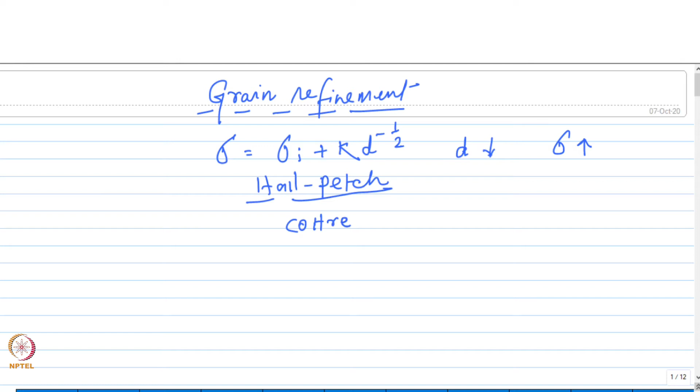This is due to the fact that as you decrease the grain size, you basically increase the grain boundary area per unit volume, and since the grain boundaries act as hindrance to dislocation motion, the strength will increase as the number of grain boundaries increases. Okay, and we have actually derived this Hall-Petch relationship based upon a theory which was proposed by Cottrell and then later extended by Eshelby, Frank and Nabarro.

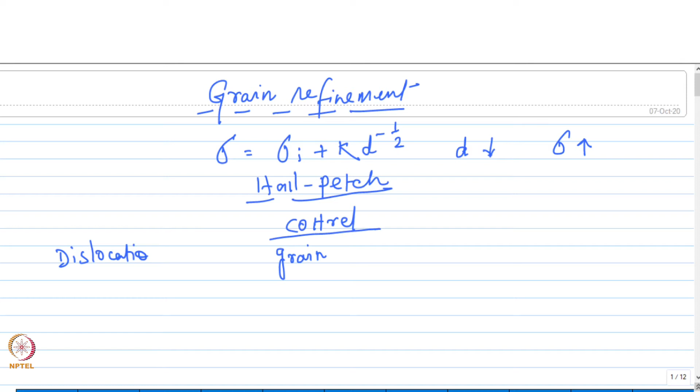So this theory is based upon the piling up of dislocations at grain boundaries. So if you consider any pile-up of a given length inside a grain like this, where the grain boundaries stop the dislocations as they encounter the boundary.

From this, you can actually derive this Hall-Petch relationship based upon the stress which is developed at the tip of the pile-up. Okay, so that's what we did in the previous class based upon that stress tau s and a critical stress which is needed for the dislocations to move over to the next grain, tau c. We actually derived this Hall-Petch relationship.

Okay, but there are certain limitations of this pile-up theory, because as we have seen, this is based upon the stress which is developed by the dislocation pile-up. So you need a large enough pile-up for that to occur. But if the grain size is very small, then the pile-up will also be small, and therefore you cannot really consider the approach that we had taken to arrive at the Hall-Petch equation. In that case you need to consider other equations also when the grain size becomes very small, because for a small grain size the pile-up will also be smaller.

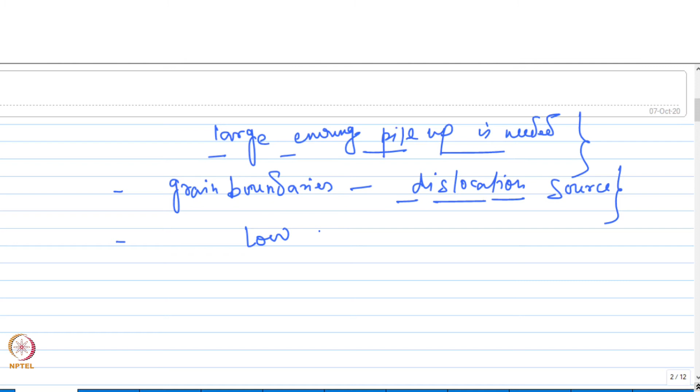And the other issue with this model or this theory is the fact that for the pile-up to occur, the dislocation movement also has to be limited or restricted. And we have seen that the stacking fault energy will play a role in that. If the stacking fault energy is low, then you can expect the dislocation movement to be restricted. But for high stacking fault energy materials, the dislocation movement is much greater because of the cross slip.

But in both kinds of materials, low stacking fault energy as well as high stacking fault energy, the Hall-Petch relation is valid. So this theory cannot really explain the effect of stacking fault energy. And as I said, on the other hand, you also have grain boundaries acting as dislocation source. So considering this, the theories which were later proposed did not really focus on the stress developed by dislocation pile-up. Rather, those theories consider the dislocation density and the effect of grain size on the same.

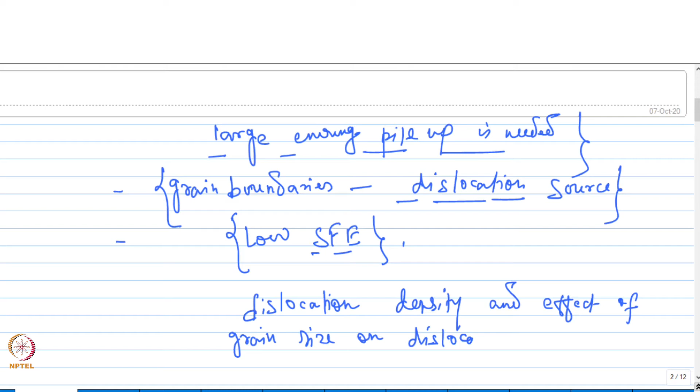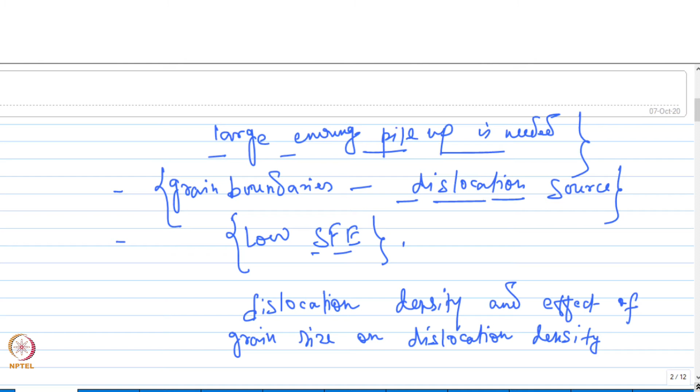One such theory or model was proposed by Li. So this basically considers grain boundaries as sources of dislocations, and therefore the dislocation density would depend on the grain size. And we have also seen before that the strength and dislocation density are related by this particular equation,

where rho is the dislocation density and alpha is a constant, typically having a value in the range of 0.3 to 0.6. Other terms we have already defined before. G is the shear modulus and b is the Burgers vector.

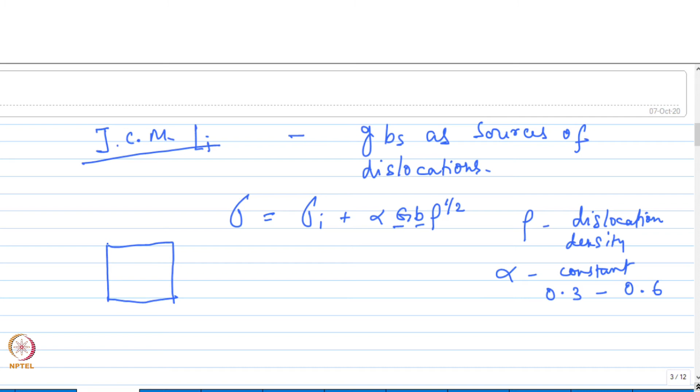Okay. So now this theory considers the grains as cubic in shape. So let's say we have a grain like this with a particular size, which is defined by the sides of this cube. So let's say that is D, that's the size of the grain.

So as I said before, the dislocations will be generated by the grain boundaries, and every boundary will have their own efficiency of emitting dislocations. So let's say M is the efficiency of grain boundaries to emit dislocations.

And this is nothing but equal to the length of dislocation emitted per unit area of grain boundary at yielding. That means when the material has started deforming plastically, at that point, the length of dislocations emitted per unit area of the grain boundary can be taken as M, or the efficiency of the grain boundaries to emit dislocations.

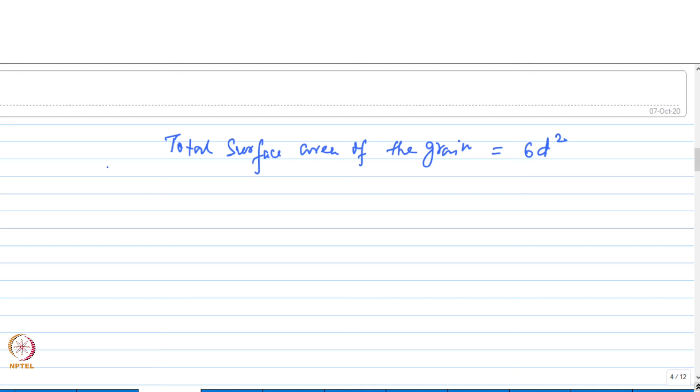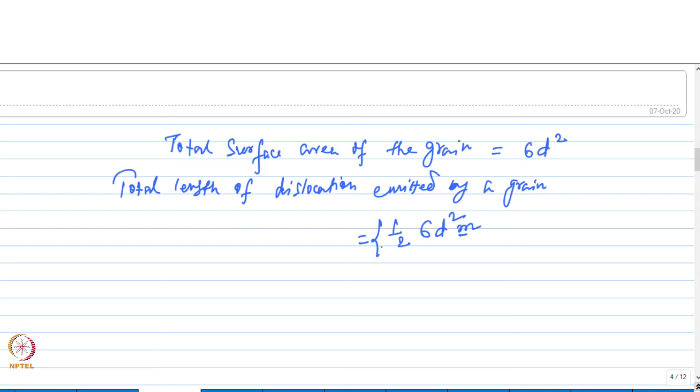Now, the total surface area of a grain like this will be 6d square. And therefore, the total length of dislocation emitted by a grain will be equal to this, right? Because M is the efficiency, so you have to bring M over here. And the factor half comes because each of the faces of this grain is shared by two grains. Each face will be shared by two grains, and that is why this factor half comes over here.

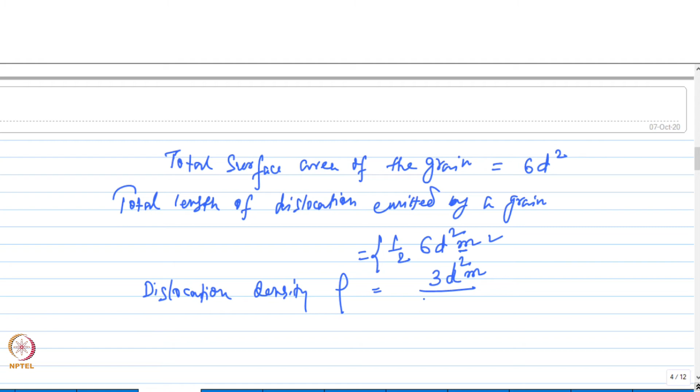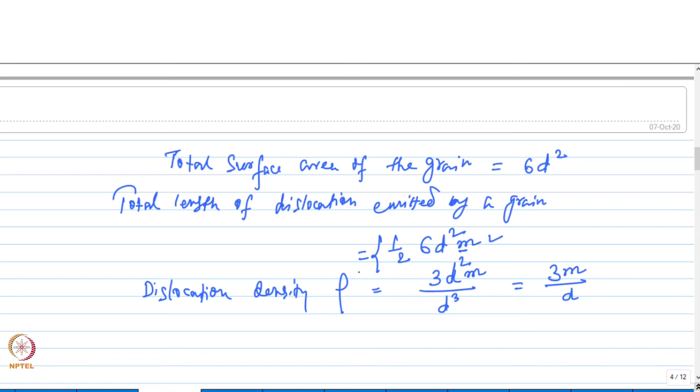And the dislocation density is nothing but the total dislocation length divided by the volume. So it is dislocation length per unit volume. So therefore we can write dislocation density rho as 3d square m divided by the volume of the grain, that is d cube, and this will give you 3m by d as the dislocation density. Now you replace this rho in this particular equation, then you will get to the Hall-Petch relationship.

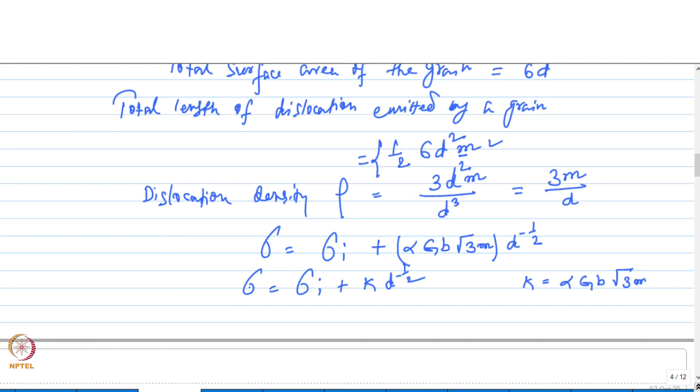Right, so if we consider this term as a constant k, then this will come down to the Hall-Petch relationship. So this is how this particular model or theory, which is known as the grain boundary source theory, will lead to the Hall-Petch relationship.

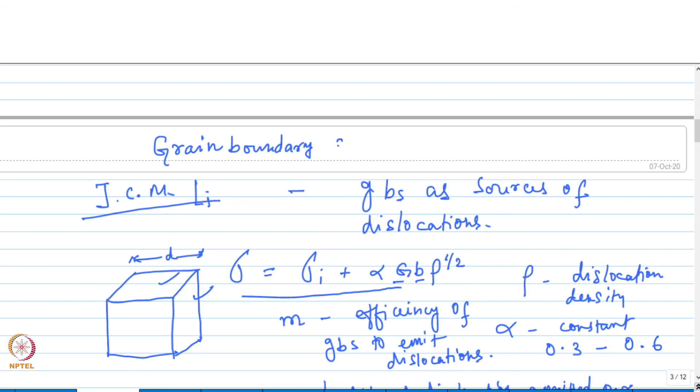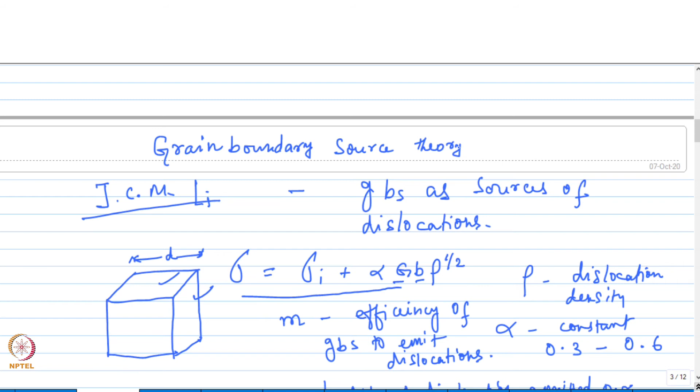A similar theory, which is based upon the dislocation density, was proposed by Conrad. The theory goes by the name work hardening theory. So this theory says that the distance traveled by the dislocations in the grains is proportional to the size of the grain.

So let's say x is the average distance traveled by the dislocations in a grain. Then we can write x equal to beta d, where beta is a constant and d is the grain size, and the strain will be given by this. Epsilon is the strain and rho is the dislocation density. So if you replace x over here, you would get this in terms of the grain size d.

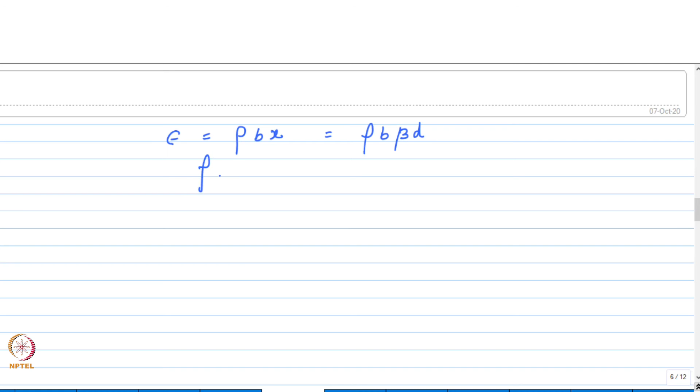So from here we can write rho in terms of the strain and the grain size as epsilon by b beta into 1 by d. So now if you replace rho into this particular equation, then it will give you this expression. And now if you take this as k, then this will come down to the Hall-Petch relationship.

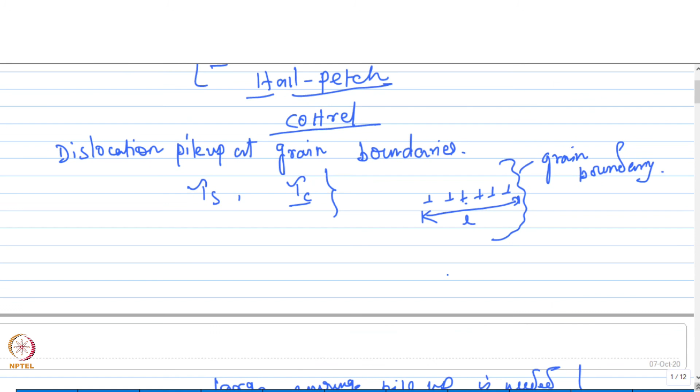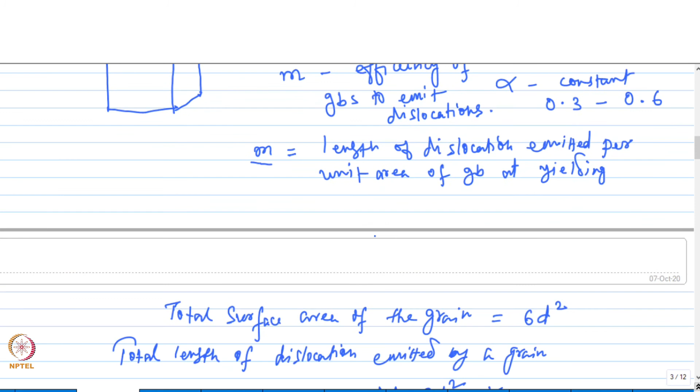So these are the different theories which explain the mechanism of grain refinement strengthening, and all of these are based upon the fact that the grain boundaries will either act as obstacles to dislocation motion or they will influence the dislocation density as the grain size is changed. So let us quickly summarize these grain boundary strengthening theories.

We have basically discussed three theories, all of which lead to the Hall-Petch relationship. The first one was grain boundary pile-up theory, which says that the dislocations pile up at the grain boundaries, and unless and until a critical stress is reached, the dislocations cannot cross over to the next grain. So you need to provide more energy or apply more load for the dislocations to move, and therefore the strength will increase. Okay.

Then we talked about other two theories, which basically talk about the dislocation density rather than the piling up of dislocations at grain boundaries, because there are some limitations of the pile-up theory as we discussed. So these two theories focus more on the dislocation density and the effect of the grain size on the dislocation density. Okay. So there are two theories in this category.

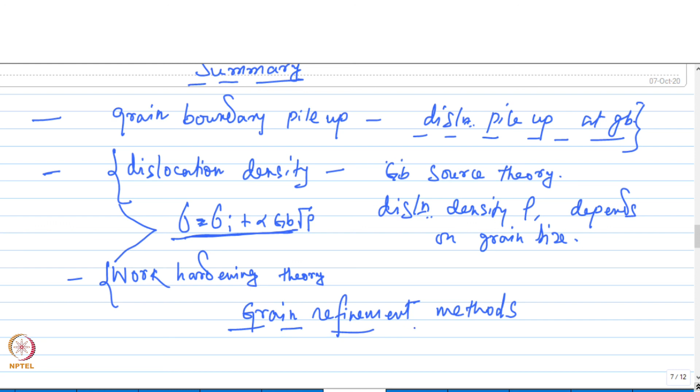All right, so this will bring us to the end of these strengthening mechanisms, especially the theories for grain boundary or grain refinement strengthening. From now on, we are going to talk about the methods of grain refinement, as to how you refine the grain size of a particular material. So this will be our next topic of discussion. But before that, let me also tell you a few more effects of grain refinement.

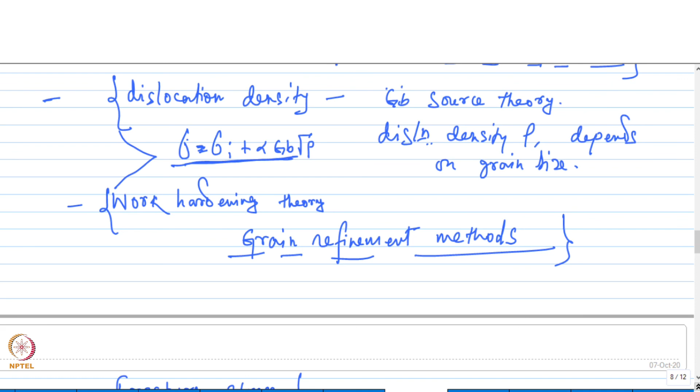For example, if you talk about the fracture stress, this also kind of follows the Hall-Petch relationship. The stress that you had seen before when we discussed the Hall-Petch relationship was primarily the yield stress, right? The fracture stress will also follow a Hall-Petch kind of relationship with regard to the grain size. So as you decrease the grain size, the fracture stress would also increase.

And grain refinement not only increases the strength, but it also improves the toughness. In fact, this is the only strengthening mechanism through which you can increase both the strength and the toughness. For most of the other methods of strengthening, the strength will increase, but generally the ductility goes down, right? But grain refinement not only increases the strength but also improves the toughness of the material.

Okay, but one property that will suffer due to grain refinement is creep, which is a time dependent high temperature deformation process, right? One of the mechanisms of creep is grain boundary sliding. So if the grain boundary area increases, the grain boundary sliding will also increase, and that will lead to more creep, and as a result, the creep resistance will come down as you refine the grain size.

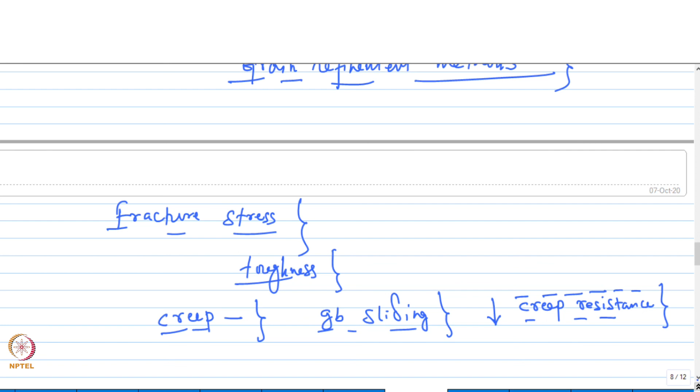And grain refinement also improves the surface finish after anodizing treatment for aluminum and its alloys. So these are some of the other effects of grain refinement apart from the strengthening.